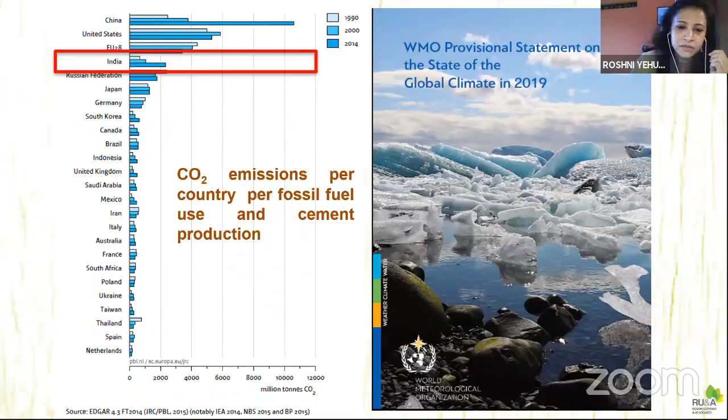So, if you're living in any residential society, there are many things you could do, including planting trees, reducing your electricity consumption, water consumption, and so on. There's a lot you can do in all these areas. Overall, at the global level, looking at global emission reductions by 2050, India's contribution to that can be as much as 14%.

And of that, you can see more than 50% is to reduce our energy consumption. Let me also tell you that this part of energy consumption, overall our per capita is low because there are a lot of people in India who live in the villages and who consume far less than what we do. So it is our duty living in the cities to reduce our consumption, which is where the carbon emissions are going up. So here's a sort of broad picture of the different areas of the world and the different sectors in which mitigations are possible.

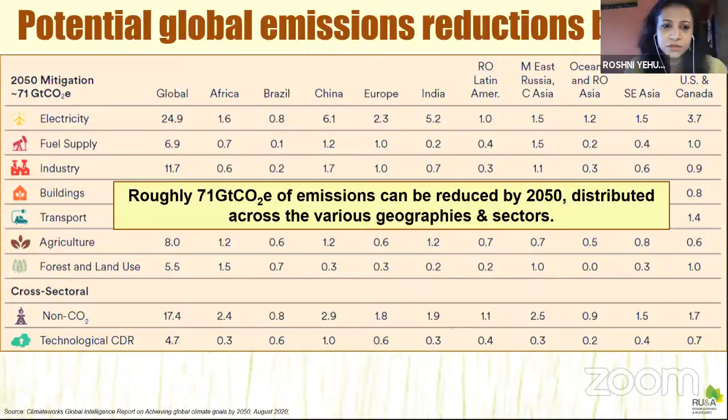So this is the overall scenario under which we are looking at this housing society and greening of housing society today. So what are the things that a residential housing society or a building can impact? Firstly, of course, the energy consumption.

So the statistics show us that the residential sector is expected to become the largest contributing sector, 37 to 38% by 2032. And we are going to consume the most amount of energy, electricity, because of the number of buildings in this sector, more than commercial. So commercial individually has more impact, but residential sector is by far the largest. And as a result of that, the carbon emissions are also, at the global level, 30 to 40%.

We also consume a huge amount of materials, but this is not within the scope of our discussion today. We're also going to look at water.

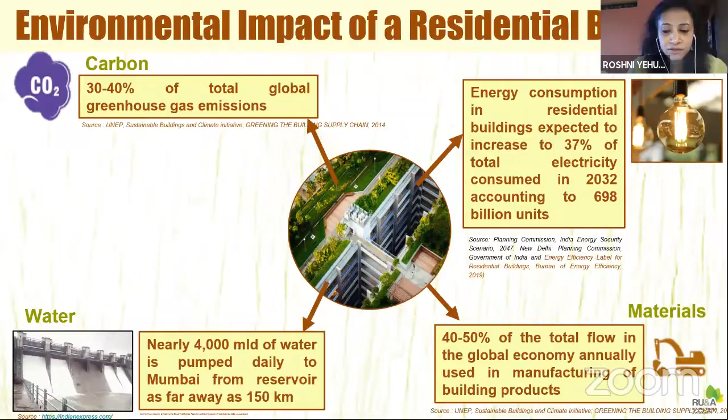Mumbai is a city which is benefited by near to about 4,000 MLD of water daily, which is probably pumped - some of it is pumped as far as 150 kilometers away from the city. So we are taking water from very far, bringing it to the city and getting it into our taps. And not everybody is aware of it. Not everybody is conserving this water carefully, because there are many people outside who do not get water.

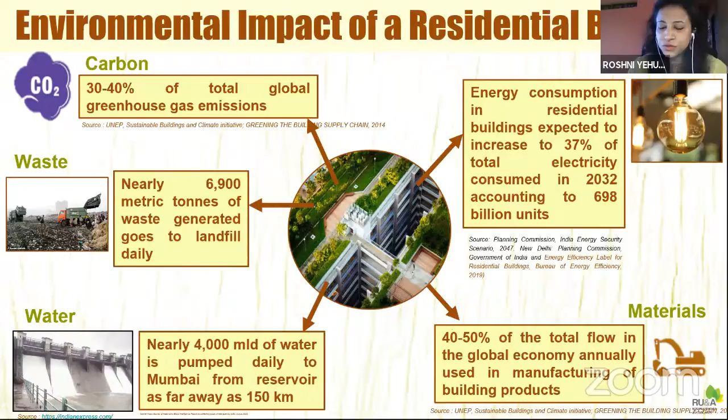And one of the biggest issues that we are dealing with is waste. We have nearly 6,900 metric tons of waste being generated daily in the city of Mumbai. And I'm sure this is the scenario all over the world in different cities, in Bangalore, Delhi, all of it. Outside every city, we have huge dumping grounds, which are a big cause of concern - air pollution, water pollution, land pollution, and in every way, a waste of resources.

So let's look at what is the kind of vision we have for a green housing society. I put forward a lot of things, and I will try to explain each one of these things to you.

So firstly is we can have energy efficiency and management. We can have water management. We can look at solid waste management. We can look at, in existing buildings as well as new buildings, visual, thermal, and acoustic comfort - many people do not have this. We can look at indoor environment quality, environment pollution and remediation in case there are issues. We're living in a city and we have a lot of problems like noise, dust, air pollution, and so on. Ecological landscape design - so we also talk about that.

And what are the regulations? So broadly, these are the areas which are applicable to both existing as well as new buildings, new housing societies, redevelopment housing societies, and so on. So let's look at each one of these aspects in more detail.

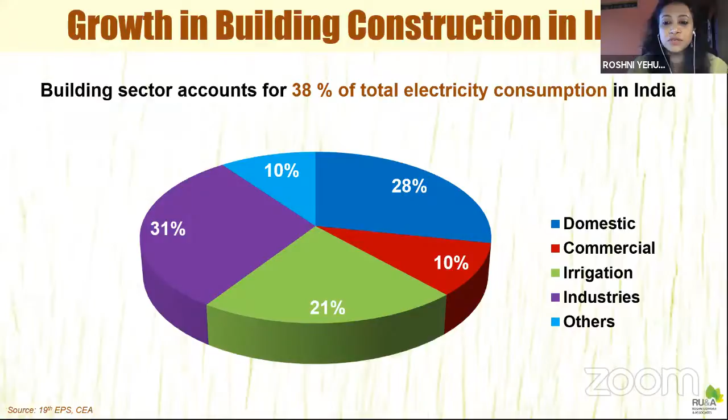So starting with energy efficiency and management. This is the existing statistics. I've already shown you this, that the electricity consumption in the building sector, that is 28% and 10% - you can see that totally about 38% is the total electricity consumption from the building sector alone.

And some of the statistics required to give you some more enlightenment on this is that we are constantly building more buildings in this sector. So new residential buildings more than 3 billion square meters is going to be added by 2030. Average energy performance index, which I will explain to you a little bit more, is in the range of 48 to 70 kilowatt hour per meter square per year.

So this can be further - this is on an average, but in Mumbai we even have 120 and so on, which is on the higher side. The use of air conditioning is increasing rapidly, mainly because the buildings are not designed for thermal comfort, and the space cooling and the fans are the largest component of electricity consumption in multi-storied buildings.

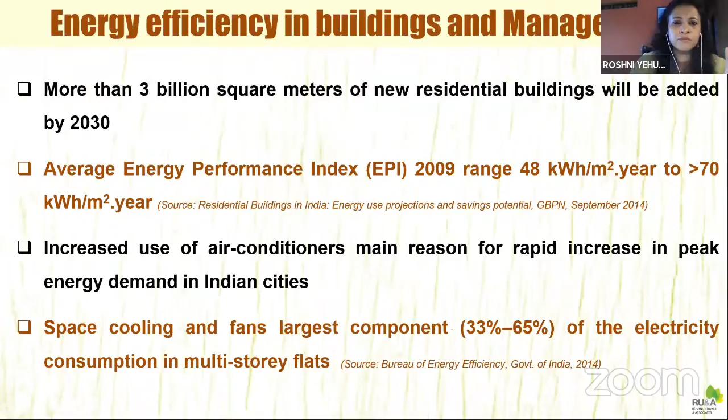So these are the background of energy. If we want to do energy management, there are two levels at which we can do it. One is the apartment level, so there are various things we can do there. The second is the common areas, like common lobby areas, staircase areas, gardens, pathways, and so on. These are areas where we can also do energy management.

There are a whole range of things that we can do, from energy efficient lamps to use of renewable energy to using efficient equipment and motors. So to begin with, let me give you an explanation of what can be done in an apartment. The first thing is, of course, to use efficient equipments and gadgets.

If you are having gadgets which are not 5-star rated or 3-star rated, at least as the Bureau of Energy Efficiency of India rates them, you can definitely try to change these equipments, and you will see a major change in your electricity bill in the long run.

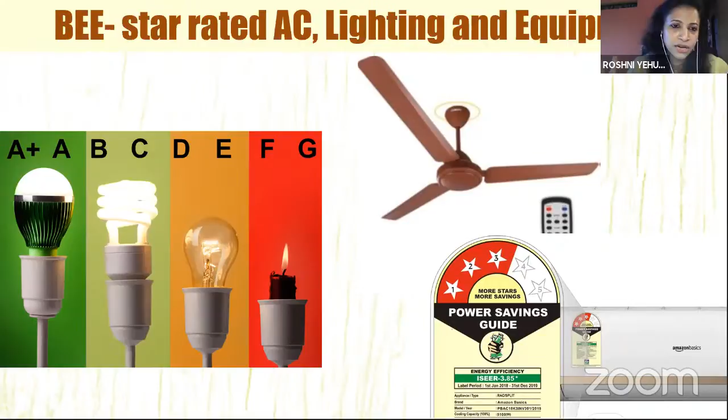So that much of your energy consumption can be brought down, apart from the fact that you're reducing your own electricity bill. You are also going to get benefits in terms of reduction of carbon emissions, etc., in the longer run. So everybody could do this as well.

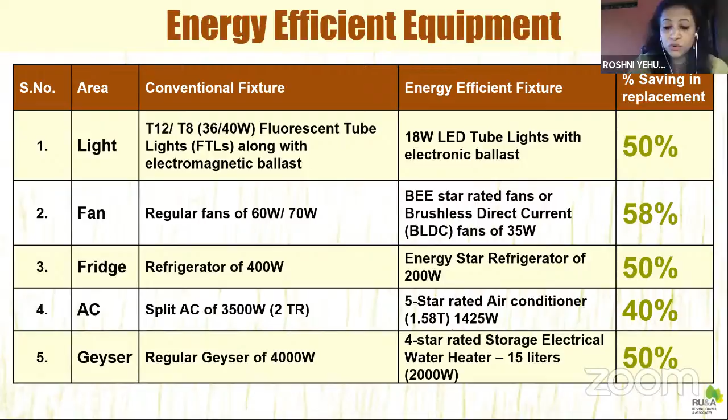So the replacement looked something like this: replacement of the existing geysers, the conventional geysers, to the more efficient geysers, the air conditioning units, efficient fans, fridge, everything.

You can see here, for example, the unit is EPI, or Energy Performance Index, which is total kilowatt hours or units of electricity throughout the year divided by your square meter of floor area. That is called EPI. So the EPI has dropped from something like 144 to 77. And as I initially told you, the average is about 48 to 70.

So imagine if you further have more efficient windows, or if you change your geyser from the electric geyser to a solar hot water system, again, the EPI can come down to the range of 30 or even 25. So there is a huge potential here in bringing down the energy consumption, and bringing down your electricity consumption means bringing down the carbon emissions.

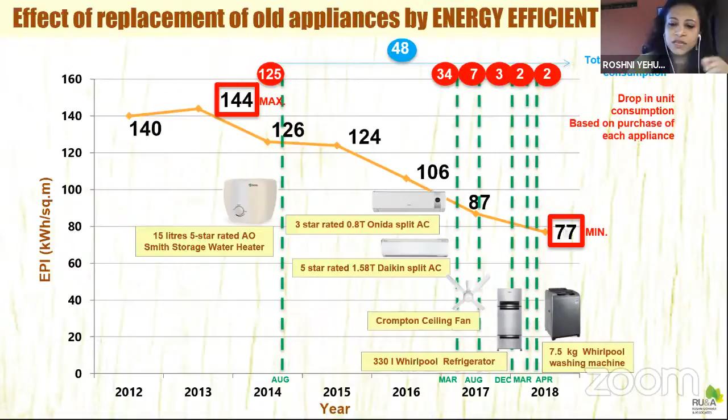So I'll quickly show you what are the sort of quick figures, because everybody says, oh, this all costs us so much. So what is the point?

If you replace the fluorescent tube light - we also consider the ballast and everything, the losses - with 18 watt lights, this is in a typical college building where we had proposed this. So from existing to new ones that are more efficient, say 18 watt LED dimmable light, the annual savings were huge, that is 68,000. But the simple payback period was just 4 months. So within 4 months, you can recover your entire cost incurred in replacing and making more efficient fittings.

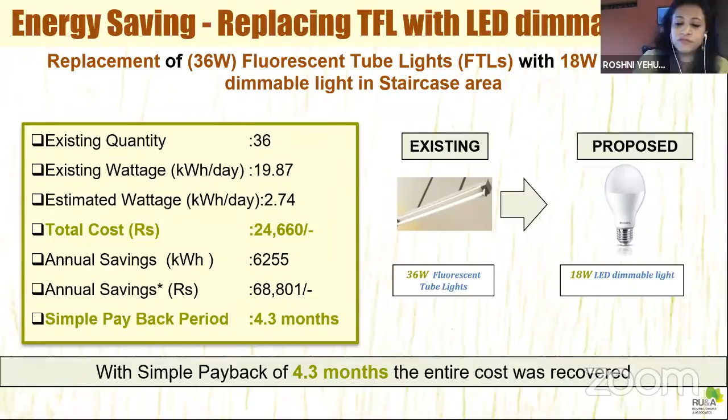Similarly, this is another example. Even for fans, you can see if you replace your existing 60 watt or 70 watt old fan with a brushless DC fan, the payback is a little bit longer. However, if you apply for DSM schemes or something like that, each of the utilities, your electricity company, also has schemes, so they can offer you the fan for half the price or something like that. There are various schemes being offered.

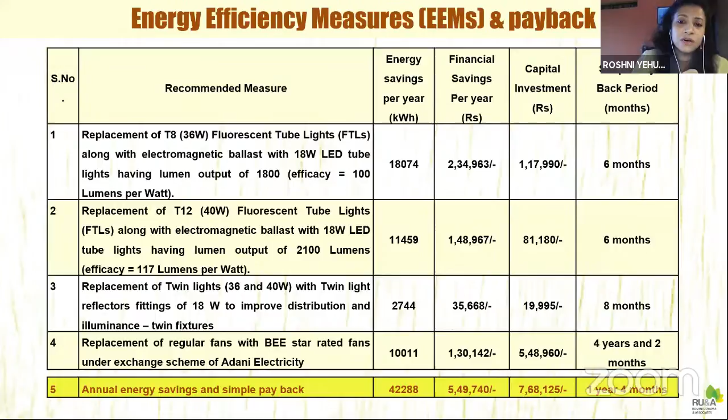So you can see here that if I take just a few items and try to put together the capital investment required for making energy efficient buildings - energy efficient lighting alone, and fans - the simple payback is not more than 1 year, 5 or 6 months. I'm able to recover my cost invested into that extra equipment, the change of equipment.

Now coming to the common area. Typically a flat would use something like between 10 to 12 kilowatt-hours of electricity per day. But then let's look at the common areas.

Common areas is where there is also a huge potential. About 30% or so, I think more than that, is related to the elevator. It's a huge amount: 30% of consumption, if you have elevators in your building, is consumed in lifts. About another 40% is common area lighting.

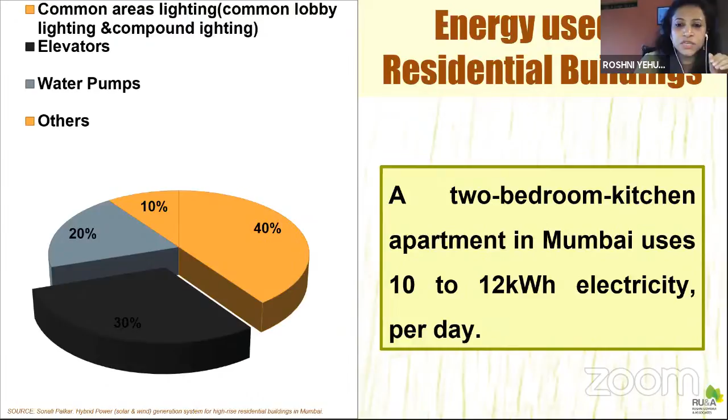This is generally found in a lot of housing societies. It may not be exactly the same for you, but generally the consumption of electricity in common areas happens if you don't have a proper motor, if you don't have proper pumps which are energy efficient, and so on. So you need to analyze, and you can also make a change in these areas. There are a lot of areas like staircases, lobbies, parking areas, which are all lit at night. But do we require them to be lit all of the time, or do we require the amount of light to be so much?

There are various solutions here as well. For example, I will show you what we had proposed for a building, and we also implemented part of the changes. If you look at the staircase area, the existing 36 watt tube lights were replaced by dimmable LED lights.

These have a sensor built in, so whenever there is a person coming, it will be 18 watts. But if there is no movement or no person there, it would drop down to 4 watts. Imagine the amount of savings. During the whole night, hardly one or two people may be moving there, so your total energy consumption can be brought down.

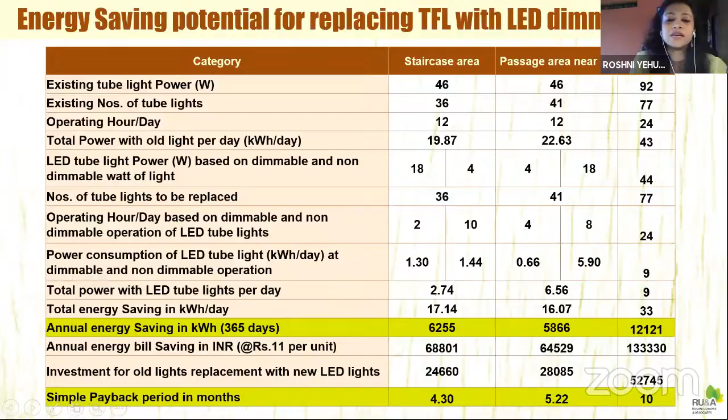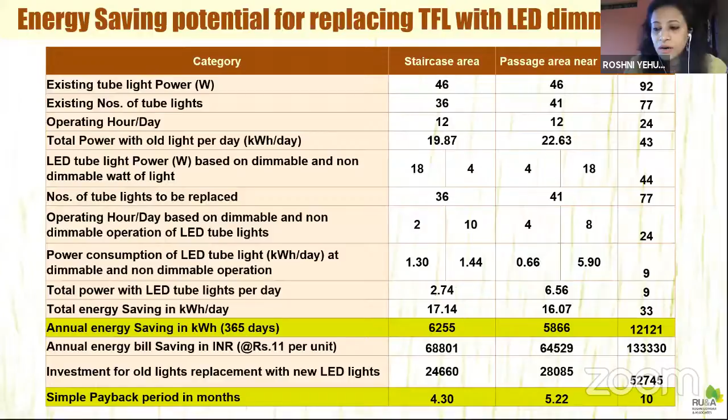We did the calculations, and the savings have already been achieved in this case. The simple payback period for the staircase area was just about 4 months, and for the passage area about 5 months. So within this much time, you can recover the cost invested, and after that, for at least 6 to 10 years, you can benefit in the long run with this kind of lighting.

The other important areas in terms of the building's common area energy consumption include pumps, motors, and DG sets, in case you have DG sets. These are also huge energy guzzling sources - pumps used for pumping water daily to the overhead tank from the underground tank, or motors running your elevators. If they are not efficient motors, over a period of time the amount of load they begin to take becomes huge.

This is where the mistakes happen. So in case you have it checked, see how much energy it is consuming, whether it can be replaced, repaired, or maintained. I have put here some standards - for example, the Energy Conservation Building Code of India gives standards for pumps, DG sets and motors. If you abide by those conditions, you will definitely have lots of savings in your common area energy consumption.

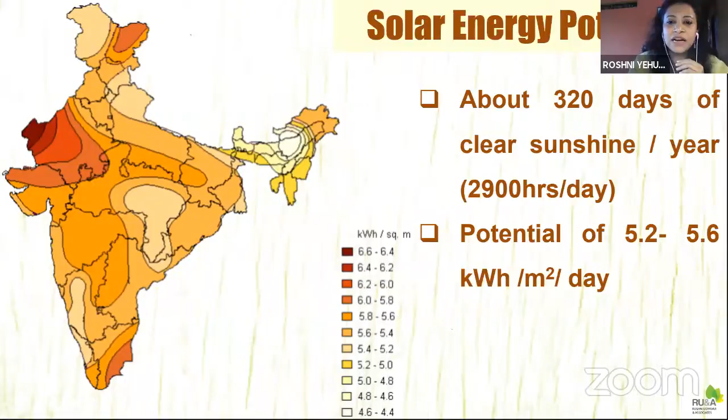Let's look at renewable energy, solar and wind. Also, we have some options in terms of replacement of some parts. India being a sunshine country, we are mostly in the tropical belt, and we have very high sunshine hours throughout the year - about 2,900 hours per day, 320 days - so this is the overall scenario. So we have two things we can do here: solar thermal and solar photovoltaic, very simple. We can also go for wind hybrid systems, which I personally have not done, but I have seen in some housing societies they have gone for it and have also benefited.

The reason being that in some times of the year, you may not get good solar output, in which case you have a wind system, and there can be a hybrid, there can be storage, and that can be used.

So solar thermal basically means use of the heat energy of the sun, mainly for heating water. There are various types of solar hot water systems, from simple thermosiphon, that is natural flow, to forced flow systems, which are pumped.

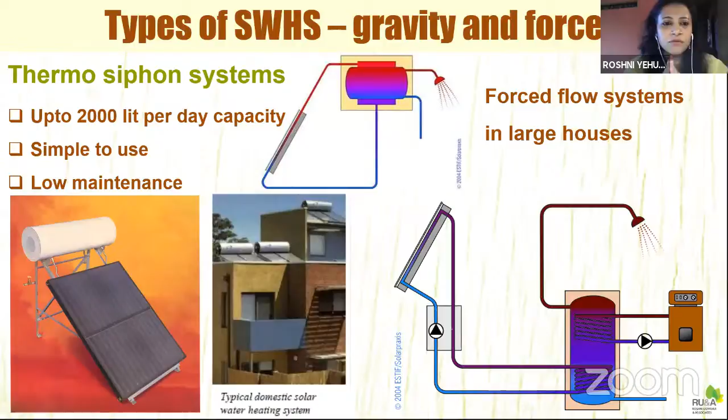Of course, for a multi-storied building, you have to have a forced flow system which pumps the water uniformly to all the flats. So that kind of thing can be done. The efficient ones are slightly costlier, but the efficient solar hot water systems use evacuated tubes.

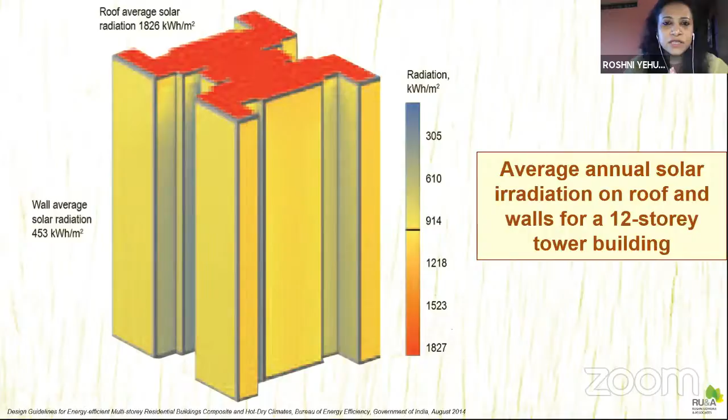As you have a higher and higher building - this is from one of the studies of the Bureau of Energy Efficiency, showing average annual solar irradiation on the roof and walls for a 12-story tower building - as you go taller, the per flat availability of sunshine goes on reducing, which is simple logic. It doesn't make a lot of sense for very high-rise buildings, because the rooftop area per flat is reduced.

As you go higher and higher, say 25 and 20 stories, the per flat availability is much less. So up to maybe 10 stories or so, it still makes sense to have solar, either in the form of thermal, solar rooftop, or PV.

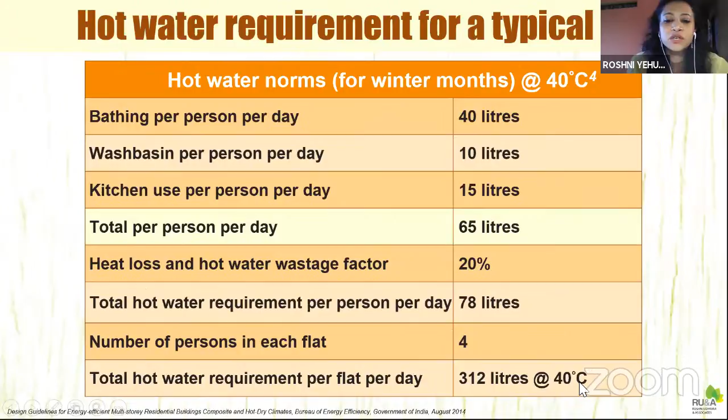This typically shows you what is the requirement of hot water. It even includes kitchen, wash basin, and other areas. So about 312 liters at about 40 degrees centigrade is what is calculated.

And again, this is from the same standard given by BEE, which shows that if you use different types of flat plate collectors, 2 meter and 4 meter square, whether you can achieve any electricity savings.

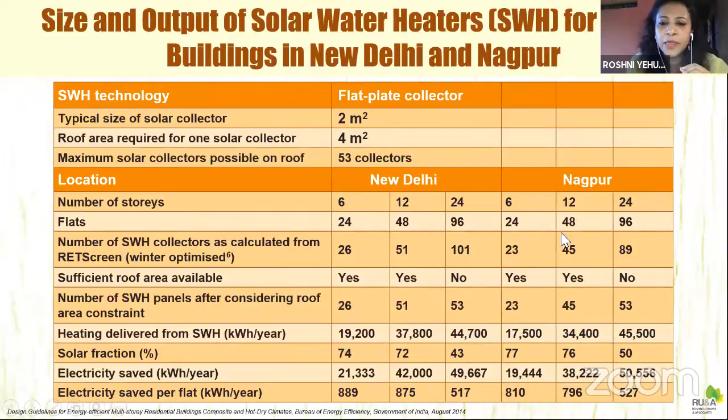You can see that when you go for, say, a 24-story building, it is not sufficient at all. But up to 12 stories, you can have a good amount of electricity savings per flat.

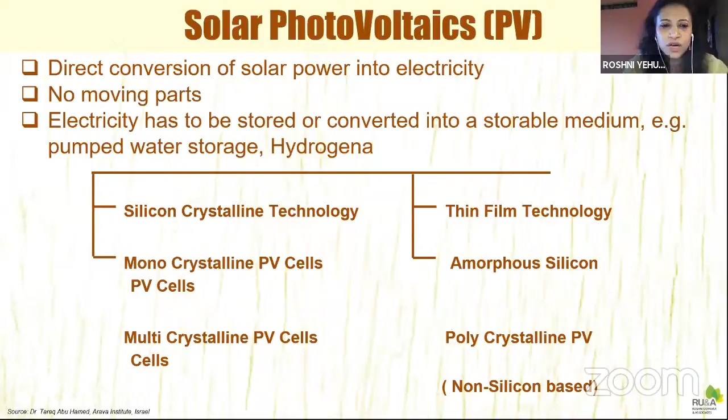Solar photovoltaic systems are systems by which you can use solar panels for generating electricity, which can be used for any purpose. There are many different types of solar panels available in the market today, but the most efficient one is the monocrystalline one, which is of course higher in cost.

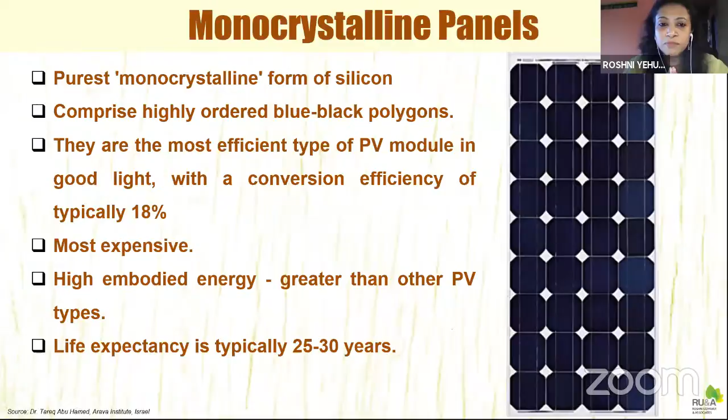There can be a little bit of thin film or something which requires double the area as compared to monocrystalline panels. But these have a life expectancy of 25 to 30 years and provide good efficiency - 18% is one of the highest efficiencies among solar panels, and these can be utilized in buildings.

So I'll show you a few case studies. Some of these are actually designs done by us for proposed buildings, and some of them are actual practice case studies.

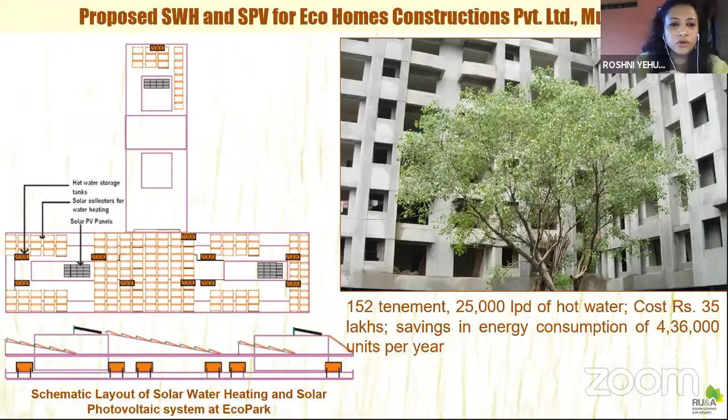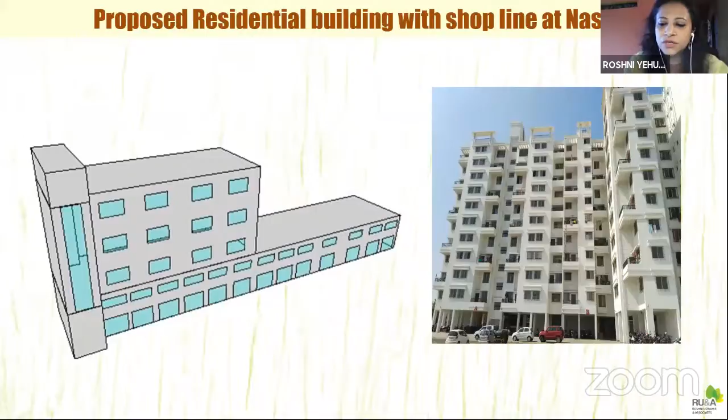This is another example of a residential building with commercial line, the shop line at Nashik, and they had to comply with the Energy Conservation Building Code. But here we had to look at the part of the building which is under shadow and which cannot have solar hot water systems, for example.

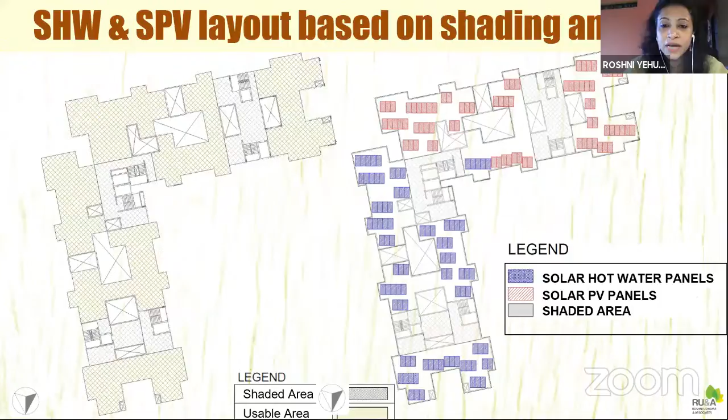The layout has to be such that the panels are most efficient, considering that they are facing the 19-degree latitude, slope, and all of that. So this is how we could do a proper analysis of the building terrace area and place those panels so that you get maximum efficiency.

Solar PV was also provided, but solar hot water system up to 40% was able to be provided on the rooftop of this kind of building.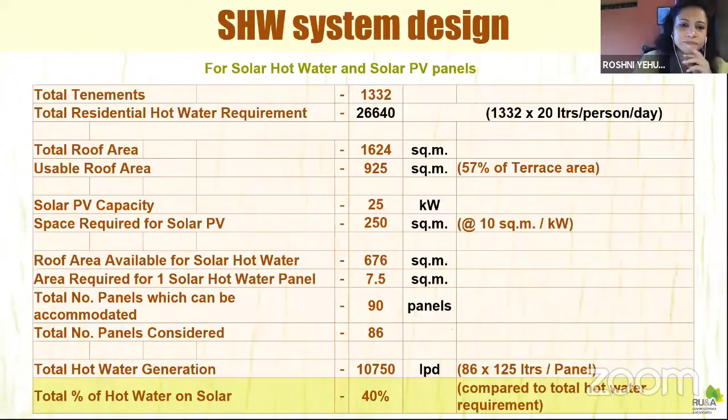As I told you, there are two other case studies which are not done by us, but which we have just covered briefly. This one is a society in Dombivli, which invested something like 57 lakhs on a hybrid power system, that is solar plus wind. We will look at what they have achieved.

Another one in Khar, Ground Plus 9, which has done hybrid as well, that is solar plus wind. These are their results.

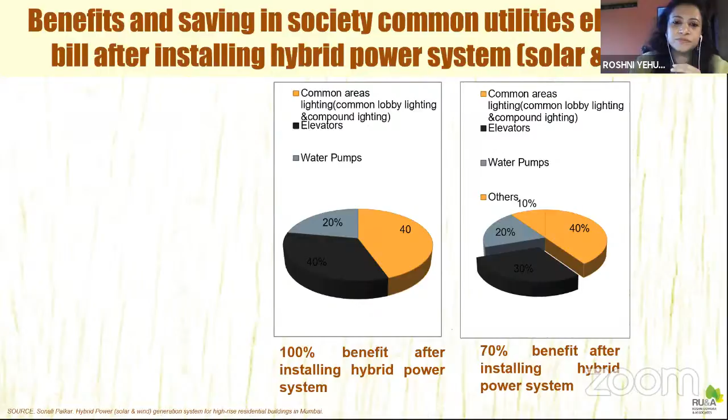In the common areas, 100% benefit was achieved after installing the hybrid power in the first case. That means all of their common areas, elevators, water pumps, and common area lighting were all powered using the hybrid renewable energy system, so they did not have any electricity bill from these sources. In the second case, it was about 70%. In terms of payback, the first case was 9 years, and the second case was 18 years.

So this is the kind of timeline they had in terms of solar and wind hybrid systems. The power generated is used majorly for operating elevators, water pumps, common area lighting, and so on. This system can be a very environmentally friendly solution. And now we also have the net metering policy, which means you can give back excess energy to the grid.

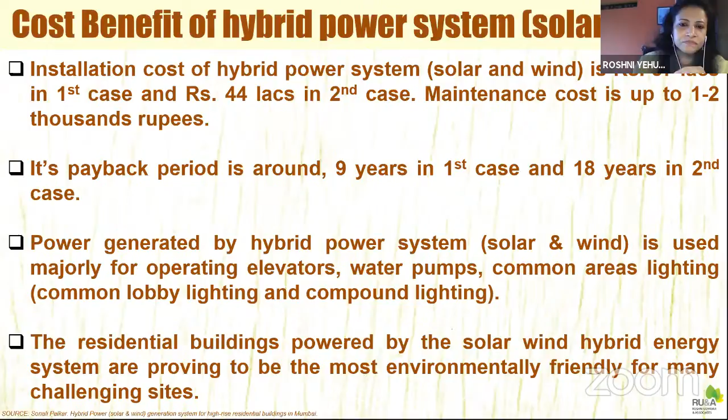This is another documented case, I think it came in the newspapers some years ago, a housing society in Bhandup which has been able to put up solar panels on their roof. With 546 flats and 2,000 residents, they installed a solar project generating about 800 kilowatt hours, meeting about 70% of the electricity needs of the society, lighting up passages, parking, common areas, water pumps, bore wells, motors, and lifts.

So the simple payback for them was 30 months, and the society will be generating its own electricity at a cost of 2.71 rupees, as per the net metering policy I believe, as compared to 14 rupees per unit which you normally get charged when you have to pay a utility company.

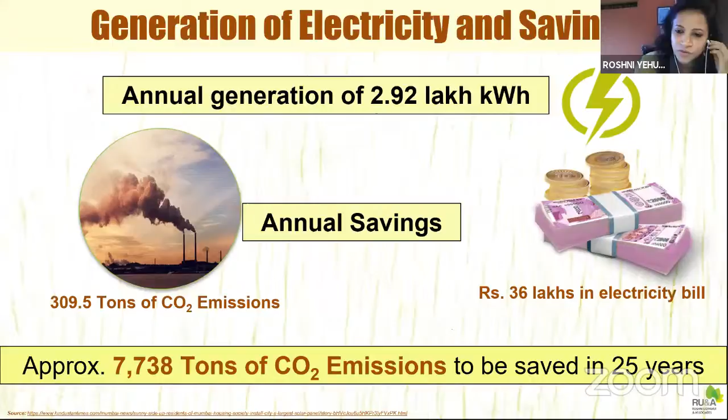So annual generation of 2.92 lakh kilowatt hours saves about 309 tons of carbon dioxide emissions, and also about 36 lakhs per year in terms of electricity bill. This is the overall scenario of this housing society which has managed to put solar PV on its rooftop. Over a period of 25 years, they have saved about 7,738 tons in terms of carbon emissions. These renewable energy systems can be grid connected, or they can be standalone systems.

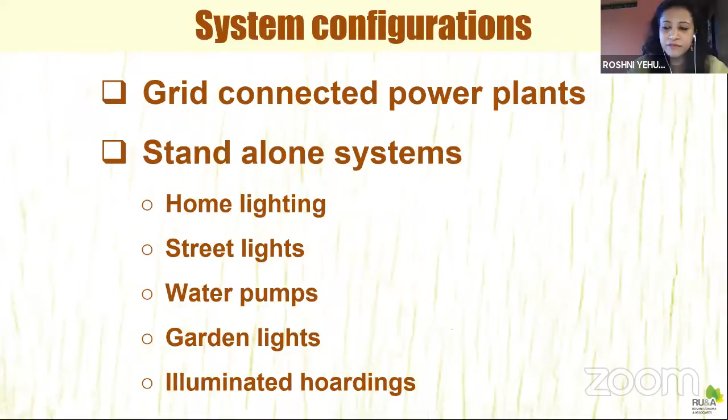Mostly when you have solar hot water systems, they would be standalone, that is, they're providing hot water to the building and not doing anything outside. Solar PV, if you have more than enough, you may also connect it to the grid and meter it, and if it is excess, you will be paid, and the net will be given to you. So these are the different types of systems.

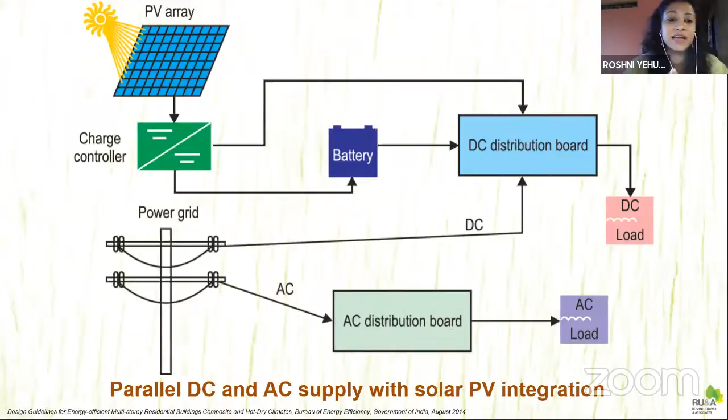You can have a standalone off-grid configuration, a solar PV system with grid-tied configuration, a solar PV hybrid system configuration, or solar PV integration which has both DC as well as AC supply, because AC is what we require for all our equipment, and DC is what we get out of the renewable energy system that we put up.

There's also an option of doing retrofits. A retrofit is the option of improving an existing building by making some changes in the facade, in the envelope of the building, like in the fenestrations or something like that. I'll quickly show you an example of a building where we did a retrofit mainly to improve the thermal comfort of the college.

This is a college building, and some of the things that we did were installing high albedo paints, introducing turbo ventilators, and the main thing we did was to have an underdeck roof radiant barrier, which reduced the overall heat coming from the roof, along with various other changes to increase the lighting levels inside the building.

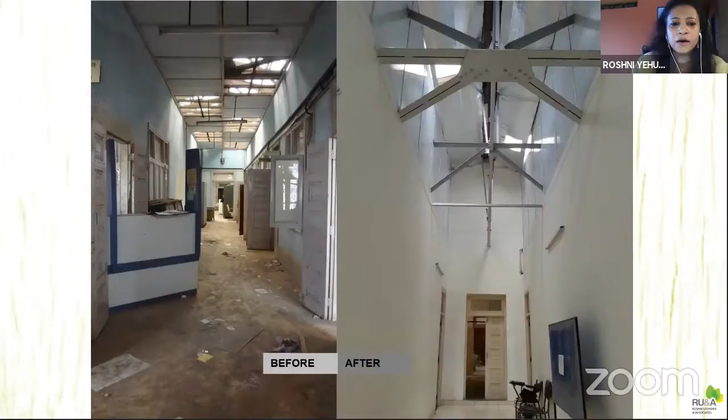So this is the final output of what the classroom looked like as compared to before, which was quite uncomfortable, and the lighting levels were also very low.

Another very good example is the New York Empire State Building, built in the 1930s with no features of energy efficiency. However, much later in the early 2000s, the Rocky Mountain Institute considered a plan for reviving and making it more energy efficient. For example, all 6,500 windows of the building were changed from single glaze to triple glaze, making it very energy efficient, since single glaze means almost all the heat comes inside the building, plus there are other benefits like acoustics.

So all of this had cumulative effects - the chiller plant size was reduced, and overall, by doing a retrofit, they were able to reduce the overall consumption by 38%. So this is how you can consider retrofits in existing buildings.

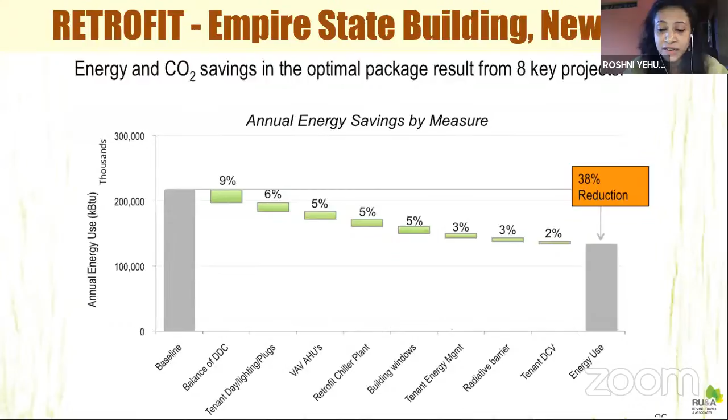A very important aspect in many buildings is the lack of good daylighting and visual comfort. This can also be enhanced by doing a retrofit - introduction of light wells in places where there is no light, such as the center of the building. Light pipes can also be introduced, and many other things can be done in existing buildings.

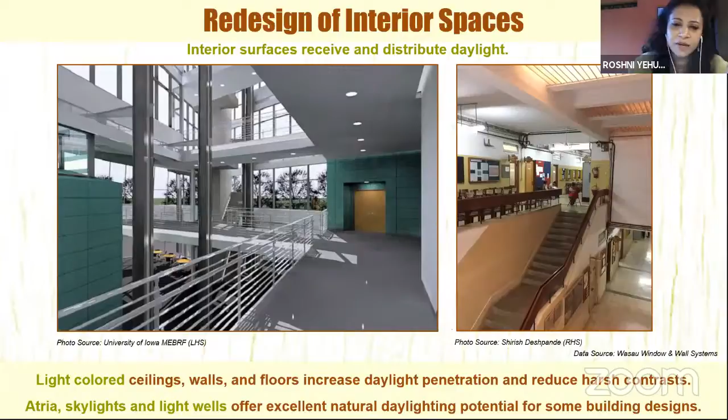The last thing I want to tell you in the energy sector is that the Bureau of Energy Efficiency defines a nearly zero energy building as one which has an energy performance index of less than 15 kilowatt hour per meter square per year.

I showed you an example of a house which had come down to 77. If you use a solar hot water system, it can come down to 30, and further many things can be done. So you can bring down the energy consumption of your flat to 15, and it would be considered nearly zero energy - of course it has to be for the whole building.

This is how, all over the world, there is now a trend for nearly zero energy buildings. In fact, the European Commission has asked all new buildings to only go for the nearly zero energy formula. This is also something you should have in mind.

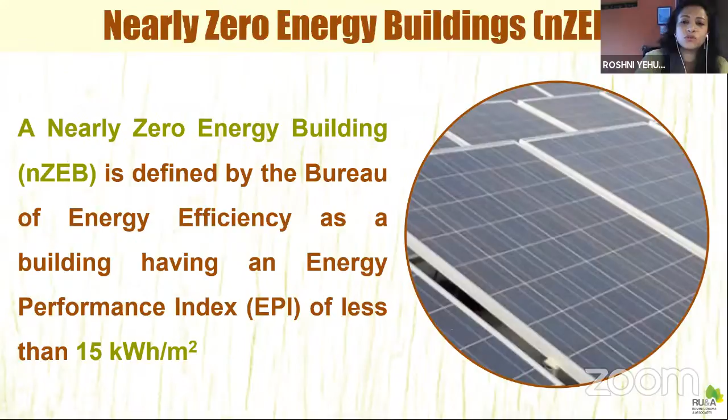In our own country we have the Paryavaran Bhavan, a very good example in New Delhi. This is actually a net positive building, because on the roof there are a whole lot of solar panels able to generate enough electricity for the building, and also send out excess energy. The main thing is that no energy is used for daylighting - they've done a very good daylighting design, so no lights are used during the day, and all other systems are made such that the entire energy consumption is taken care of by the rooftop solar plant, which also acts as a shading device for the building.

So that was about energy. Now let's look at what can be done in the area of water.

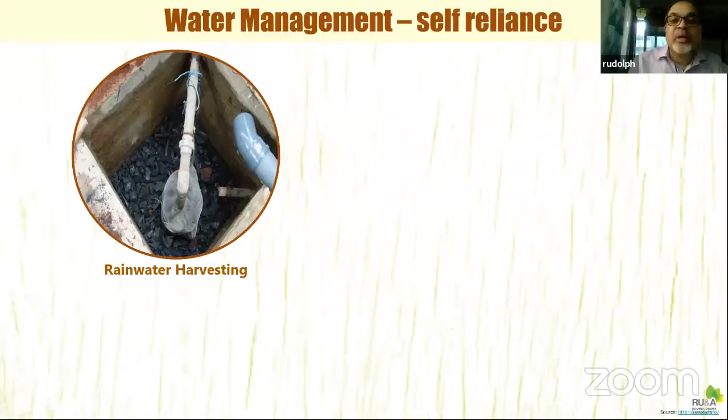Rudolph mentions that before going to water, there are a couple of questions. He asks if he may ask the questions now, and is told yes. Karthik Menon is asking for comments on net metering versus storing the electricity generated from PV cells using batteries, and what would be a better idea considering both environmental and economic factors.

For storage, we only have solutions such as lithium ion batteries, which are not such a great solution. There are new options coming in the market, but still in the experimental stage. So environmentally, storage is not a good idea - net metering is definitely better. But there are certain government norms to look at, for example 80% needs to be consumed by the building and the excess 20% goes back, and some minimum percentage of energy has to be taken from the utility - that minimum percentage is also defined. So considering all those things, I think net metering is better.

Thank you, Roshni. Caroline has a question: is there a panel of companies who can be approached to help housing societies with solar fittings?

I think there are a whole lot of companies empaneled with the Maharashtra Energy Development Agency. I'm not sure if they have listed them, but maybe we can check on their website. I know there are many empaneled companies, both in the renewable energy sector as well as the energy efficiency sector, and I'm sure these can be approached. They are all certified or empaneled by the state agency, so they are most reliable.

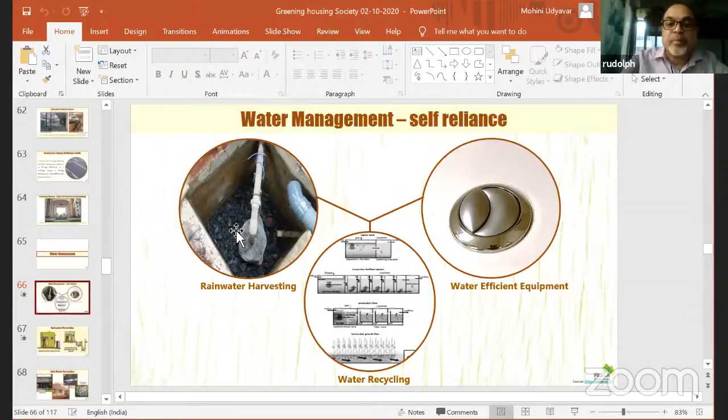Roshni, Karthik has another follow-up question: does using a solar-powered water heater provide hot water during the night too? Does it also involve storing water without losing its temperature?

Yes, you can get hot water throughout the day, provided proper planning is done. I know many societies have installed solar water heater systems without planning properly, and there are issues like people not getting hot water when they need it. But if planning is properly done, and the entire system is properly insulated with the correct R-values as required, and so on - I showed you a schematic in which the different flats are configured as per a particular system -

then yes, you should be able to. It actually looks at the maximum amount of hot water required, say for 4 families, and 1 unit is connected to 4 families. So at any time of the day, the maximum amount of water should be available for this family. If you design it that way, there should not be a problem. If you don't, there will be issues - you may not get exactly the kind of hot water you're normally used to with an electric geyser.

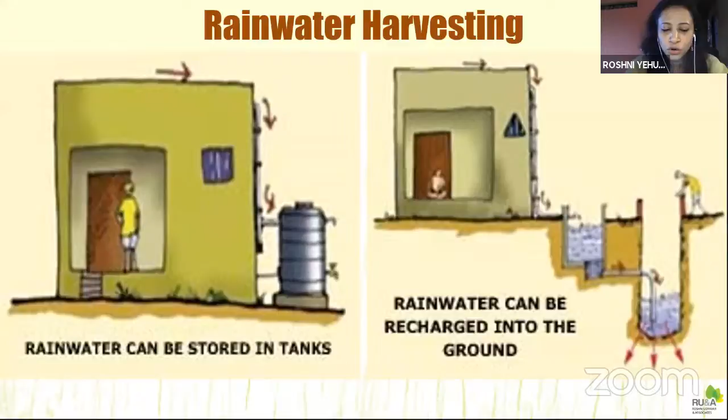In ancient times, almost all individual houses had their own rainwater harvesting system underneath the house, storing the water underneath. Those were all systems of the past, but storage is one option. Second, if you have a good chance of recharging the groundwater - if your soil and geology in that particular area allows you to recharge - then you can also recharge the groundwater.

The various components involved in rainwater harvesting in your building are the catchments - the areas which can catch the water. You can see I've put different numbers here, 0.95, 0.45 to 0.6 - these are all the runoff coefficients. Different surfaces have different runoff coefficients, which simply means how fast the water flows on them.

A space like grass is actually going to absorb the water, so the runoff is much less. However, after a certain point it will be saturated and then it will start to flow. Then you will require some channels.

You will have to either have some kind of piping system for collecting this water from the catchments, or filtration systems - these are pre-made filtration systems which can be attached to the downtake pipes, and then they can filter the water. They have some pre-made filter material, or there can be an actual filter made in the ground before the water gets stored somewhere, or before it even gets recharged into the groundwater.

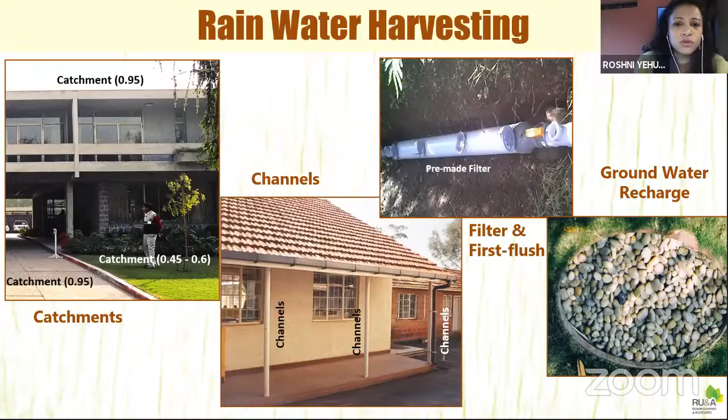Finally, the groundwater recharge itself can be done - it can be done in existing wells, bore wells can be recharged, or you can even have a groundwater recharge system made especially in your building. So you have the catchments, the channels, the subsoil water, the deep level water - all of these can be recharged using a rainwater harvesting system.

How much water can one harvest? There is a very simple formula for the total potential of rainwater that can be harvested from your rooftop. As an example, from 100 square meters of area, considering about 2000 mm of rainfall and 0.85 as a runoff coefficient - which is generally what a concrete surface allows, or even more - you can harvest up to 170,000 liters.

So there is a huge amount of water that's running off. Think about how you would like to at least recharge it to the ground, if not store it. Storage has problems of space, and it also has problems of cost, because you need to invest into a storage device. But if you can, then why not?

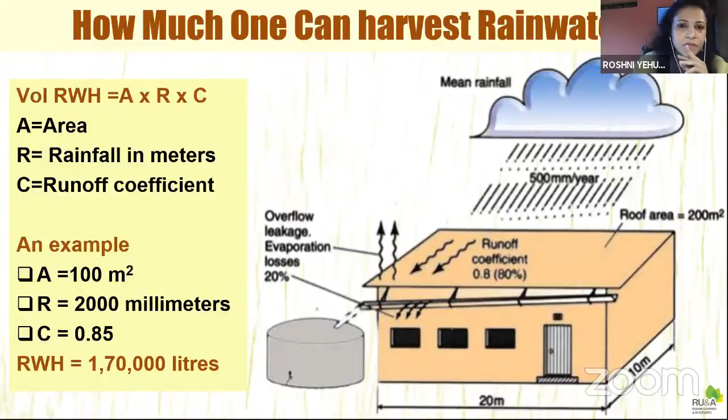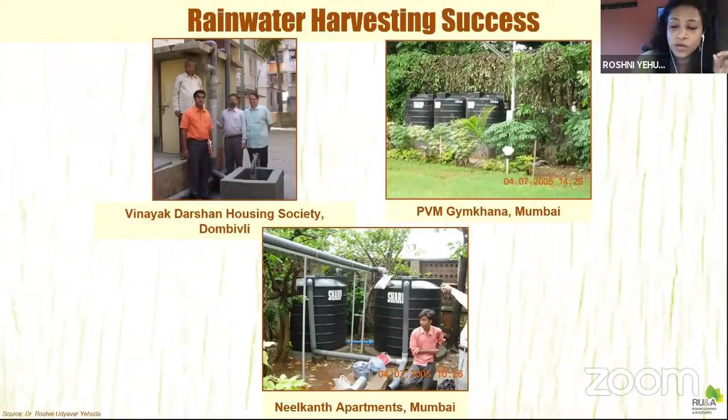I have seen a house in the outskirts of Mumbai, an entire house which had like 4 large tanks. During the rainy season in Karjat, they were collecting all the water and then using that water throughout the year. So that is also possible, but of course the scale is different. In housing societies, the scale is different. These are various places where we have successfully done this, and we know that a lot of housing societies have been able to successfully install rainwater harvesting, at least for groundwater recharge, if not for storage and reuse, and at least been able to bring down their tanker water consumption, which was a major problem in some areas.

I just want to also show you a large scale planning that we did for a high-rise building in the suburbs of Mumbai, which is really a redevelopment project. The problem was there was no space. The geology did not permit us to put in too much water into the ground. So we had to come up with really innovative solutions, because like open wells, we had all of this stormwater system designed in a way with barriers and with percolation pits and so on, in order to allow the water.

So you can see these are recharge pits. There are baffle walls at regular intervals. Then there are open wells that we made, which would of course be closed with something, but these are open wells because there was no place basically to store the water. So in large buildings, especially high-rise tall buildings, we have to consider innovative options of doing rainwater harvesting.

So what we were able to at least theoretically do here was to, for example, have an underground storage tank of rainwater harvesting with 98,000 liters and 4 holding tanks on the surface of 60,000 liters. So total about 240,000 liters of storage. Surface runoff from the site from paved and landscape area was directed for groundwater recharge through percolation and recharge pits in the existing stormwater drain. So it was all designed in that way, covered and all of that.

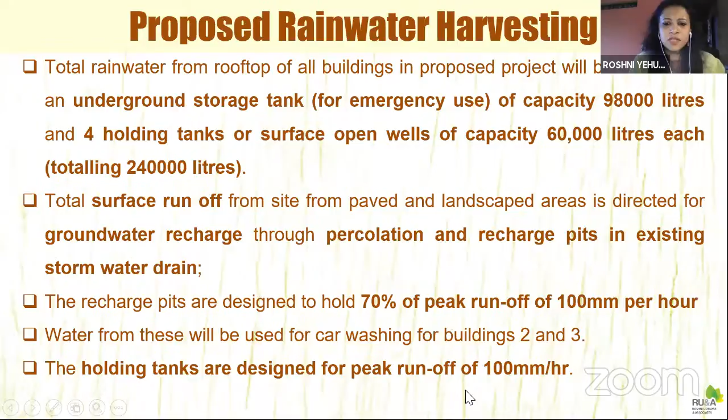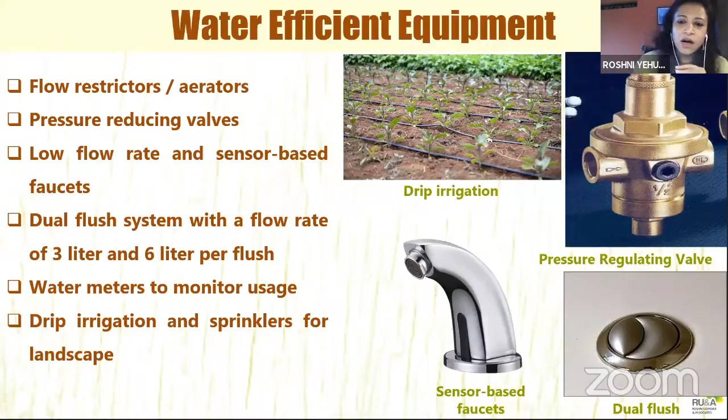Then in terms of water efficient equipment, one can make sure that all the equipment, whether it is a pressure regulating valve, or if you don't have a dual flush system, then have a dual flush system at home. You can have sensor based faucets, but those are mostly for common areas, common spaces where people don't care to close taps, or you could ask people to close the taps. You could also have drip irrigation, not only for your common areas, but also for your housing inside your own houses, inside your balconies, so that you use much less water than what the plant requires. Sometimes people over-flood the plant with water. So these are all water efficient things that can be done.

And if you have space, then you can also think of a decentralized wastewater treatment system. Here are some examples mainly done by the Eureka Forbes Institute of Environment many years ago, and also by Dr. Gokhale. He has done this sort of gray water recycling mostly in many places using reed bed systems. So actually what you're seeing are gardens, but they are basically water treatment systems. Your gray water coming from bathrooms and kitchens doesn't contain a lot of pollutant load, and you can easily treat it by taking it through the roots of plants, which treats it, and then it can be used for landscape irrigation as well. So depending upon space and other constraints, you can even consider this as an option.

So the next area is solid waste management.

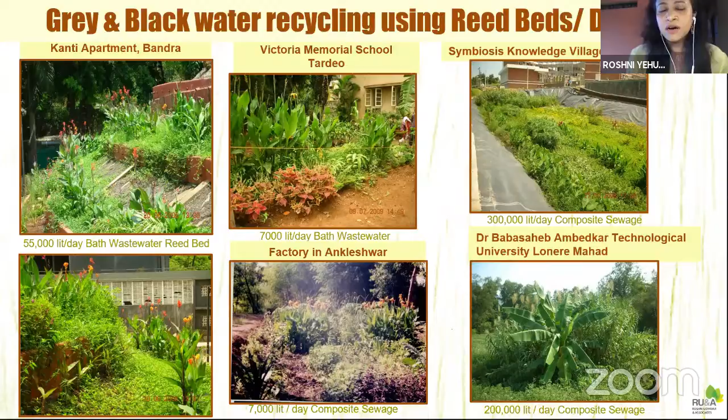So the examples that I had shown in the previous slide - these are all grey water treatment, and also in some cases black water treatments which were done by simple filters. When you have something more, like a black water system, then you can have a baffle tank reactor, for which you will require underground space, similar to a septic tank but with more baffles, and there is also a filter medium put into it so that the water moves and is more and more clarified as it goes from one stage to the other.

Okay, that helps. Thank you.

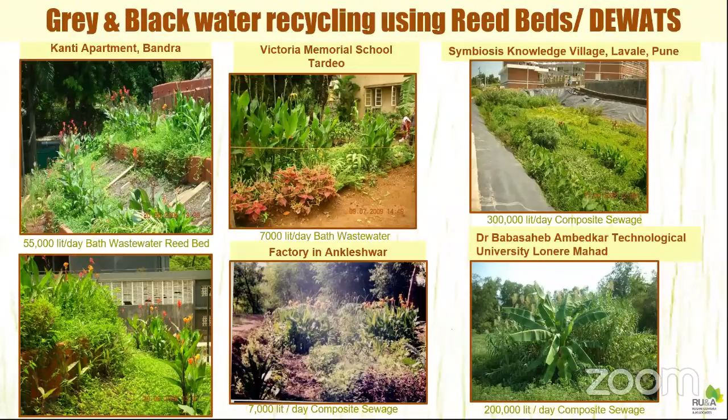He asks, rainwater harvesting has a filtration system. How can that be cleaned?

So there are two systems. One system you can put in the downtake pipe itself - this is like a removable filter. You can remove the entire filter and then every year before the monsoon, that entire filter can be either replaced if it is completely choked, or at least cleaned up. So those are the filters that go in the downtake pipes. I don't know if they are available now - at one time they were, or we actually had them made in one of the colleges.

Then there are those filters which are in the ground. Here what we do is we generally have a backwash system. The backwash system is designed so that just before the rainfall, we clean up the entire system. You allow the water to flow in the reverse direction and remove all the pollutants out, and there is an exit for the pollutants.

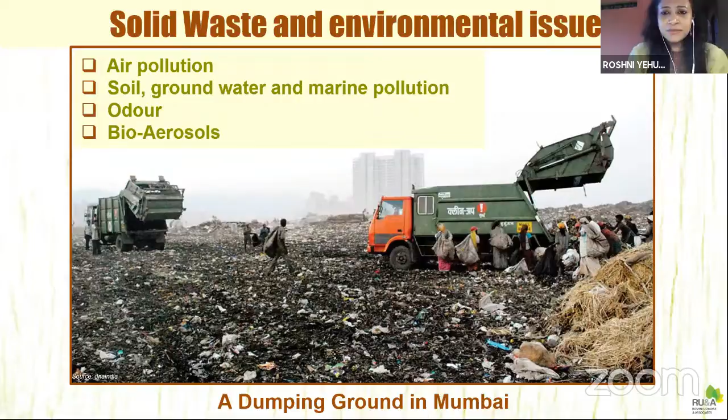There are other issues as well. Waste is a huge problem in our city, causing damage in terms of air, sound, soil, odor, and now even bioaerosols, which are very dangerous because they carry pathogens and can be very harmful. So waste management, if done at a segregated, decentralized level in the society, can help in reducing the municipal infrastructure.

It can be done at the level of a single building, or if there is not enough space, it can be done at the level of combined 2 or 3 buildings, or even at the ward level.

We had a webinar a few weeks ago on solid waste management, and we came to the conclusion that the new Development Plan of Mumbai has allocated some spaces in each ward known as the place for waste facilitation. So it is possible that we can approach this in case it is not possible within individual societies. If it is done within the society, there's nothing like it, but if not, it can also be done at the ward level.

So there you will have to approach the local representatives, get together with other society members, and do the segregation.

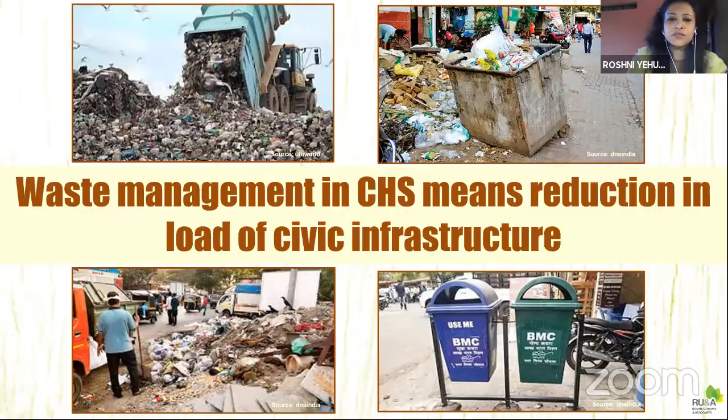Waste audit is very important, to know what kind of waste is probably coming out of the building and what goes into what. So initially you can do these studies to find out the quantum of waste coming out, and design your system accordingly.

If you're making an organic waste system, you need to do a proper waste audit. For organic waste, there are various solutions like organic composting, vermicomposting, and if there is no space, even electric composting - which uses electricity, but I'm just showing you that as an example. If you have a lot of space, you can also consider biogas, especially if you have a lot of organic waste and other organic loads nearby. So these are the various options for treating wet waste.

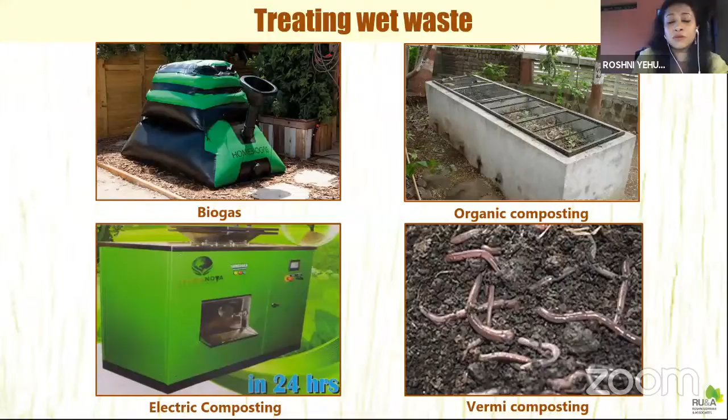There is also one more option: city farming. This concept was developed by late R.T. Doshi, who has 1,200 square feet of terrace in Bandra. Here, the waste is directly used in the plants. In his flat of 1,200 square feet, he was growing about 5 kgs of vegetables and fruits daily. So this science exists, but one needs to study it, and this can also be done, leading to growing things in your own society.

Segregation, of course, is a major aspect. Every building can do e-waste collection. Today there are various companies which install e-waste collectors - they will collect e-waste from your building at regular intervals, or you can connect with the local raddiwala or kabadiwala and give these things segregated. All you need to do is provide separators at maybe 2 or 3 floors, or have one common collection point in the entire wing or building, depending upon the size of the building.

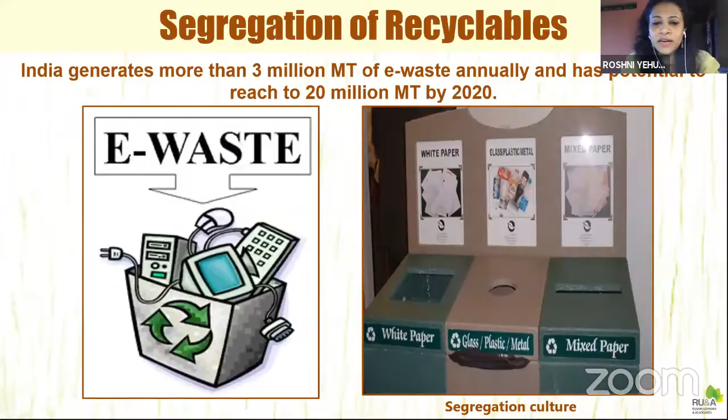The important thing in solid waste is the characterization of the waste - what kind of waste is coming out in terms of organic and recyclables. This aspect is very important to design the proper system. The appropriate technology can be selected, and selection of technology also involves not creating new problems such as rodents and mosquitoes, especially in the treatment of organic waste. This should become very important to consider at the planning stage itself.

Health and safety: while the BMC said you should do the waste only at your building level, my concern really is that the health and safety of buildings cannot be compromised, and this should be paramount while designing any system.

If you can develop business models, that is what happens to the organic compost - can it be at least utilized so that you do not have any requirement of buying fertilizers or organic compost for your building? And if you can make small saplings or sell something like that, that can also be considered a business model. Mostly, I have found that housekeeping staff takes care of the recyclables themselves, but even that can be included in the business model.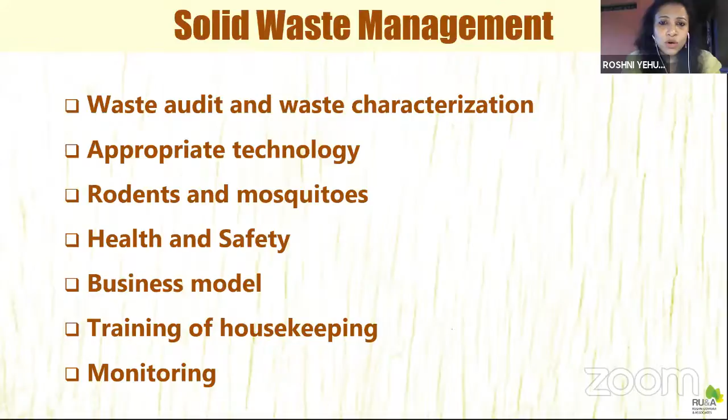Training of the housekeeping staff is very important, and this needs to be done at regular intervals, to see that new staff is always trained in segregation and doing things properly. Otherwise there can be lots of issues, which I have written down here. And monitoring of the waste system, especially within your premises, is also important - even if you have a segregation system, monitoring of that is an important aspect. So that is about waste management.

Should I go ahead, Rudolph, or do you have some questions here? As of now, there are no questions on this section.

Okay, and on rainwater harvesting, there was a question - one was by Pankaj Chowdhury. He wanted to know what is the typical cost for rainwater harvesting for a society having 2 wings and 7 floors each. I cannot give you a one-word answer for that, because I wouldn't know what kind of geology you have, whether it allows for groundwater recharge, or whether I can put in a storage system. So one has to know those details. There is no thumb rule, although I can look at all my projects and I do have some kind of thumb rule as to what it would cost if I do storage systems. But offhand, I think it would not be correct to give you a number.

So can I volunteer a number? We have seen that when you do it for a recharge system, the thumb rule is around 2,000 rupees per flat. Just keep that as a thumb rule - it could vary, like Roshni said, based on your particular area.

And we had Melissa Vaz who asked about water meters. So Melissa, what is your question? If you could just put on your microphone and ask the question.

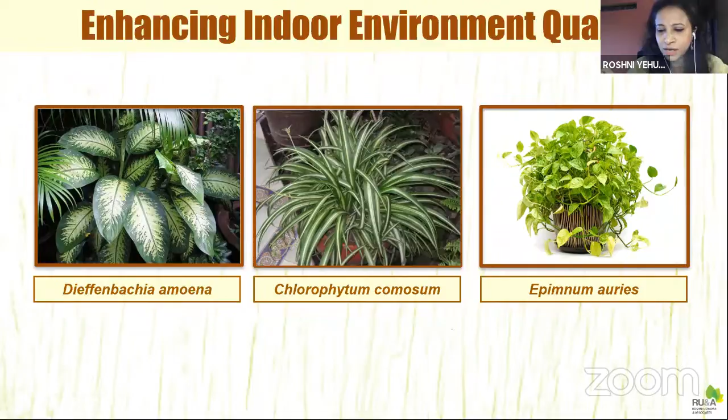The important thing is firstly to have good ventilation. You should be able to flush out the air on a regular basis. Don't keep your house always closed. Having plants also helps in reducing the VOCs, chemicals, and SPM. And in the worst case scenario, have an air filtration system capable of absorbing the VOCs and SPM levels. So these are some of the things that may be encountered, and there are solutions for this.

In terms of carbon footprint, if you reduce your energy consumption, which I talked about in the beginning of the webinar, you can look at the carbon emissions that your building or society is going to reduce. So you can offset your carbon emissions in that manner.

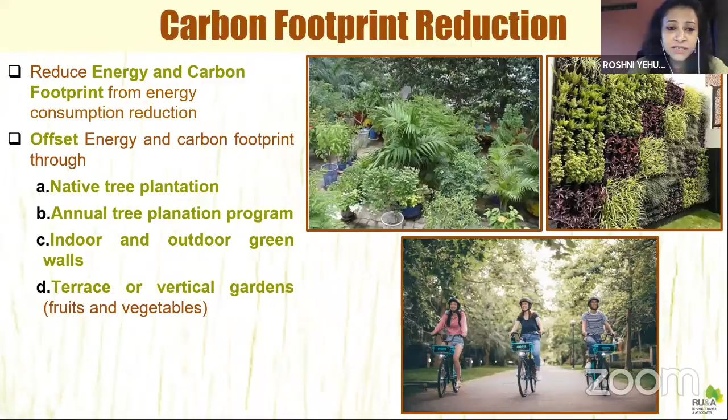You can also have a tree plantation program on a regular basis. If you have space in your society, plant indigenous native trees, which may increase biodiversity as well. You can even have vertical gardens or terrace gardens if there is space and people who volunteer to take care of it. There are lots of people who have the time to do this, so maybe they can volunteer to grow vegetables in certain parts of the building if space is available.

But the point is, if you want to consider what kind of indoor air quality is there in your house and how to improve it, there are various solutions for this as well - things people have done which we can maybe partly, if not wholly, adopt.

In terms of landscape, lots of buildings and housing societies have spaces which are probably unused, lying in bad shape, not providing anything, and probably becoming a menace because garbage can be thrown there, debris can be thrown there, or they can become sources of various other nuisance. These are probably spaces one can consider for various kinds of things.

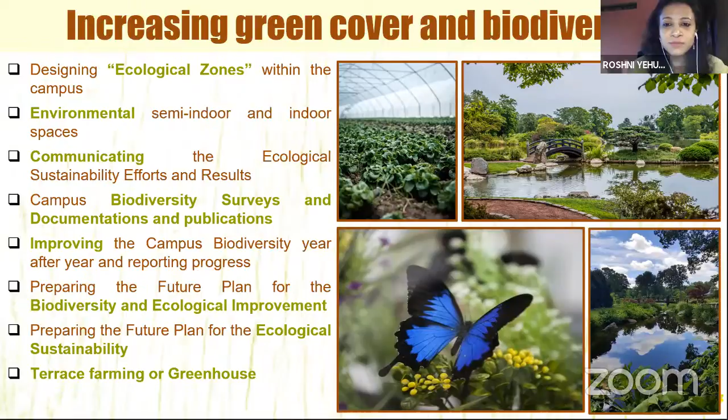Quickly, I want to show you that doing an audit for all of these things is a very good idea. One can do an audit, and the process for this generally is to look at historical data - electricity bills, water usage data, solid waste data. All of this collection of historical data is very important, which you can do voluntarily with your own building members, or a consulting agency can do it.

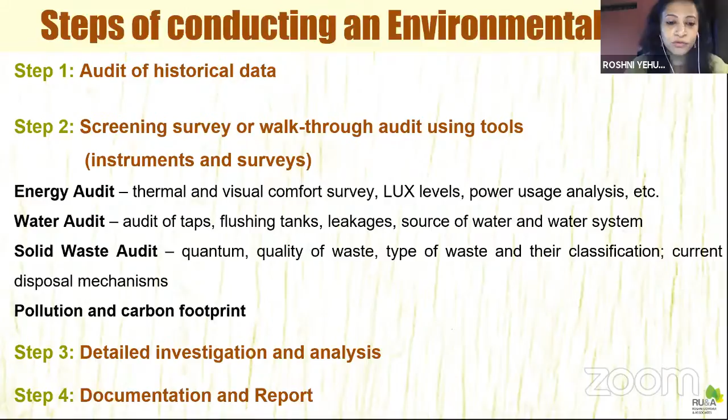You can actually visit and go through the building, do a screening and walk-through survey. You can use tools to measure different types, like for energy audit, water, waste audit, and even for pollution you can check SPM levels in certain places. You can then do a detailed investigation and analysis, that is the third step, and finally come up with a report as to what can be done in your society and what would be the cost of doing that change.

So a number of things in terms of planning and resources is important. What kind of space you have, what is the cost that will be required, can it be done in phases, would it require maintenance? I was just discussing with Caroline about this before the webinar, that maintenance is a very important factor. We may introduce a green element, but in so many societies we have seen that post maintenance is not thought of, and that becomes a huge, maybe in some cases even a white elephant, which doesn't work.

So maintenance has to be thought of right in the beginning. Awareness of the people, so knowing is important. Participation, cooperation, these are all very important. And finally, training, especially the people who are actually involved in this. As Avinash Kubal was mentioning a while ago, involving the people, involving maybe the children of the society in taking up some of these issues is also a very good idea. Maybe they already are learning all these things in their schools, and probably they can be the leaders in the housing societies to take this forward.

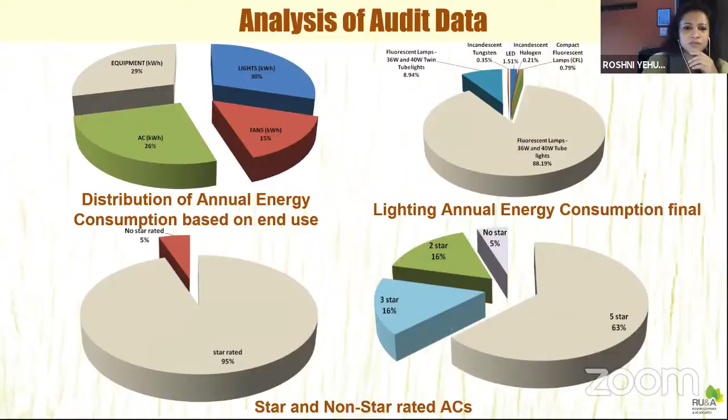These are some of the sort of analysis we did, different types of audit data. So we get the consumption data and so on. Finally, the last part is monitoring, training, capacity building. So all of these things can be thought of.

You can train people in all of these various aspects of green building. You can have different occasions. You can put up a communication hoarding - maybe somebody in the building is very good at preparing communication hoardings. You can have a special communication for different parts of the building, which will encourage people to save energy, switch off things when they are not required, and so on. Because everything is not technology. We can put in place green technologies, we can put in place efficient lighting, but if people are not concerned, then ultimately we miss the whole boat. So all of these things should be thought of.

Finally, I take a few moments to talk about redevelopment. All of the things from energy, water, waste, including biodiversity, and everything can be done in a redevelopment project, provided you incorporate this at the planning stage. So make sure that if you are approaching a developer, or thinking of doing it on your own, and you're appointing a project management consultant, then you have taken into consideration all of these green aspects. Make sure that the project management consultant does have a person on board who is going to design for all of these things in advance. And probably you can check all of these things in advance.

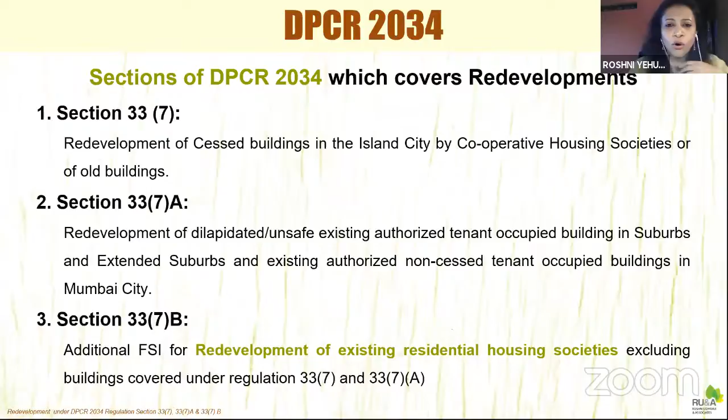The first two are for cessed properties and dilapidated buildings and so on. But section 33(7)(b) is the one where redevelopment of existing residential housing societies is taken along with additional FSI. So most probably all the housing societies here would fall under this category, unless they fall into the first two categories.

And compromise in this case can have many severe repercussions for you, especially with respect to light and ventilation. A lot of buildings today, especially in the city area, face the problem that the lower floors are not getting light. And I'm not talking about SRA buildings, the slum redevelopment buildings. I'm talking about proper buildings where people pay a huge amount of money, or maybe have not paid money, but of course they are getting a larger area. But if you do not get light and ventilation, then it is a problem, because your earlier house may have been getting a lot of light and ventilation.

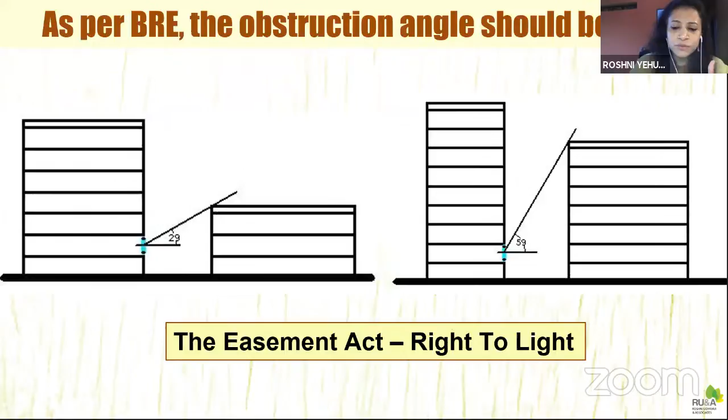And in terms of health, this plays a major role, because you need natural light as a means of good health also. Even when there is no space in between buildings, like I'll show in these pictures, you can see the gap between buildings in many of these is hardly anything. So even in terms of ventilation, these windows are meant to also act as ventilation sources as per the DCR, the development control rules, and they do not serve this purpose, because the gap is reduced and there is no cross ventilation. In fact, it can become breeding grounds for mosquitoes and other things in the future.

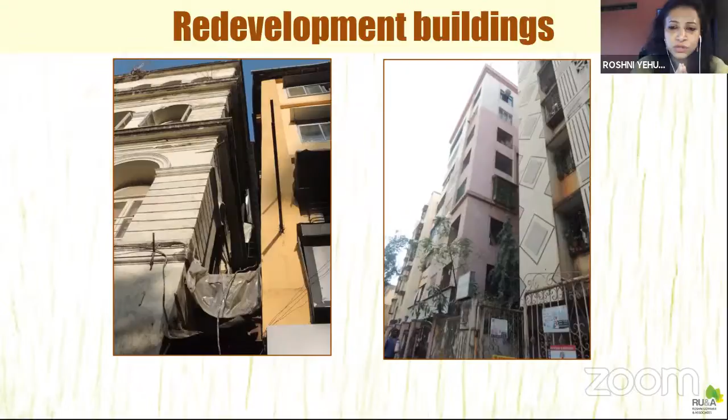So this is one mistake that a lot of people make. These are some of the acts that guide this. The National Building Code has standards for lighting and ventilation. The DCR also provides basic norms for window to floor area ratio, what it should be, and so on. So at least refer to these when you are going for a redevelopment, and don't make these mistakes.

The second thing that commonly happens is parking. When you go for new buildings, you add whole additional floors for which you also need to provide parking facilities. Sometimes you have double parking and all of these parking arrangements that you provide. As a result, if you currently have a lot of open ground, you're converting that into a concretized area. And then during the rainy season... I had actually given a report on why flooding has increased in certain areas now, because a lot of areas have gone into redevelopment with this excessive concretization.

The runoff coefficient of these concretized surfaces is close to 0.9, whereas gardens and softscapes have a runoff coefficient of 0.2 to 0.45. So almost 50% of the water falling on these softscapes gets absorbed into the ground, while 100% of the water falling on concrete surfaces runs off. So all this leads to excessive water on the roads and excessive water in the entire stormwater system.

The stormwater system of Mumbai, we're still relying on that old system, which was designed for a peak rainfall of 25 mm per hour and a runoff coefficient of 0.5. Whereas now, the peak intensity is much more than 25, and the runoff coefficient is also close to 1, because everything is concretized.

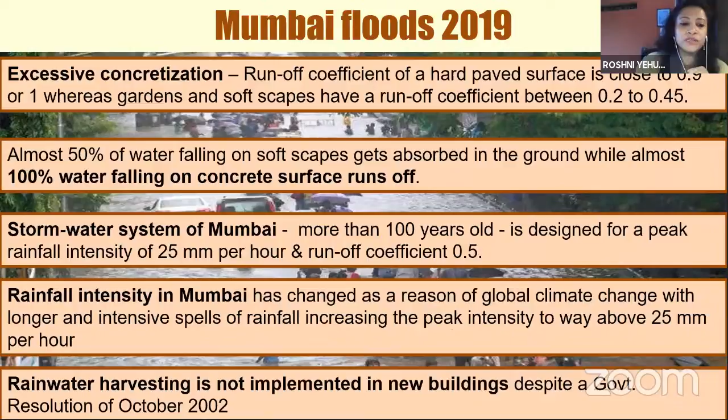So make sure that you are not doing these mistakes. These are some of the common things that have happened not so correctly as far as environment is concerned in redevelopment projects, and one should look out for them.

Finally, a last word on government policies and green regulations. One thing that helps people use renewable energy is the net metering policy. If you put up rooftop solar PV or solar thermal, you have the option to sell it back. You can look up SECI, through which several companies do this entire process for free as part of the central government's policy. They will come and check the feasibility of the project. There are companies assigned to do this for you, so you do not need to invest anything. They ensure the amount goes to them instead of to the utility.

Apart from that, there's the National Building Code 2016. Architects refer to the National Building Code for most things, and in 2016 there was a major change — it added a whole Volume 2, Chapter 11, which only talks about sustainability. It includes all the aspects I've talked about, and architects generally have to refer to it.

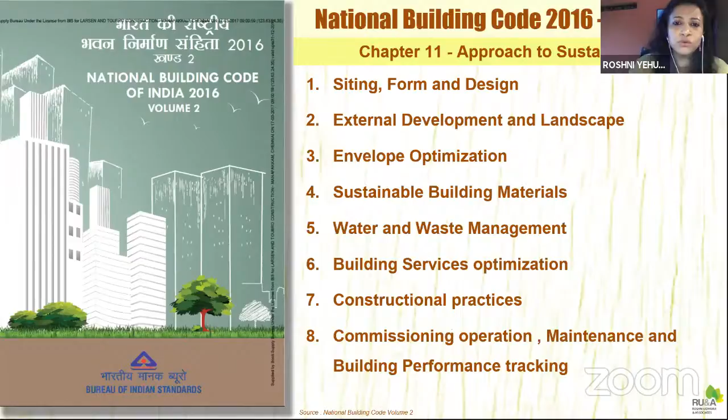We also have the Energy Conservation Building Code, which until now was only meant for commercial buildings. But in 2018, the code was also introduced for residential buildings — Eco Niwas Samhita 2018. When going for new buildings, you can go for an energy efficient building, which reduces your energy consumption in the long run, and you can be rated as per the code of the Bureau of Energy Efficiency.

Lastly, there is also a star rating. Just like you have star ratings for equipment, you also have star ratings for residential buildings. This can even be done at a flat level — if your flat is energy efficient, you could have it rated. You'll get a passport as well as a plaque you can put outside your house, saying yours is a residential energy label, like 5-star or 3-star. I think it's a very good means of communication, and it sends a good message about a housing society or an apartment. It can be done for both existing and new buildings.

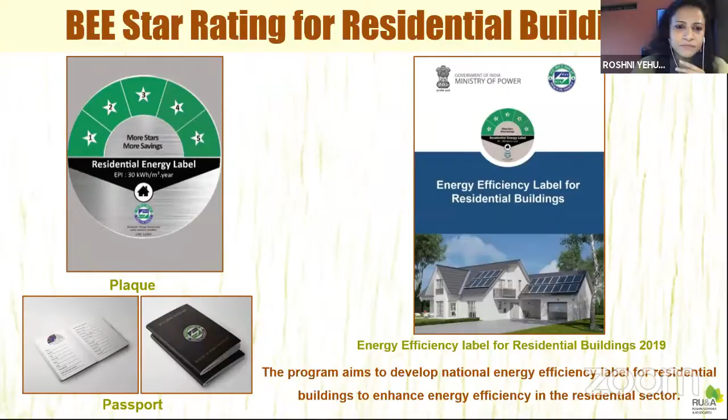So this is, I think, the last point. Finally, we talk about all these measures, and our ultimate aim is to give back to the environment what we have taken so much from it. We benefit from it, and we've seen during the lockdown how much we have destroyed and what the effects are. So we try to go net zero in all these areas — energy, water, and waste — to make buildings net zero and give back to the environment.